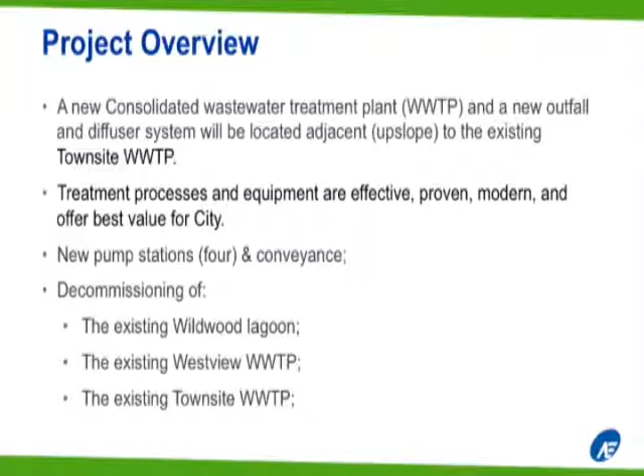So for newcomers that don't necessarily know these interesting areas of the city that I know quite well, this is the Wildwood Lagoon. So this is the Lund Highway here, and it's off to the right. You don't really see it unless you know that it's there. That's the Wildwood Lagoon. This is the existing Townsite treatment plant, or to be specific, that little thing right there is the existing Townsite treatment plant. And First Beach is this area right here. And here's the Westview treatment plant site. You're probably most familiar with that one.

So about March last year, the city asked Associated Engineering to work up 2 possible themes, and eventually selected the natural integration theme, which was a theme that would integrate the facility into the natural environment and blend in as much as possible with the surroundings. And we'll show you what that has involved.

But at that time, we gave quite a few sort of landscape views of things, and I think we have one or two in the slide deck that I'll show you shortly. We had a public open house on May the 10th, showed this approach, and Council passed the motion on the 17th of May to proceed with detailed design of the natural integration theme. You may recall that this is what it looked like.

Here was the plan view that we used at that time. And I said was because it's slightly changed. There's a significant group of trees here and another significant group of trees here. The roadway doesn't go through them anymore. It actually comes around them down to this area. But otherwise, things were pretty much the way we had laid them out in May 2018.

Okay, and again, Chair, from the bottom of the new proposed road around the trees, we have a dedicated right-of-way on that dirt road, correct? Yes. That's currently where one of the influent lines to the town site comes from, along that roadway. Okay. Are those the green roofs right there we were talking about? Thanks.

I'm not sure how much you want to know about the process, but I'll just go through the key unit processes that make up the overall system. Wastewater arrives, goes through screening, degritting. That removes a lot of material that can be problematic downstream. It gets into pumps, wraps around equipment, various things like that, and grit causes a lot of wear. So the earlier that's dealt with in the process, the longer all the equipment lasts downstream.

Then we have secondary treatment, which is an aerobic activated sludge system. Over 90% of the treatment systems around the world use one form of this or other, so it's a tried and true system, and when it's done in a modern way it's a very effective modern system as well. Secondary clarifier, ultraviolet disinfection prior to discharging through a new outfall system and diffuser that's about 60 meters deep, just off of First Beach, and about 1.5 or maybe closer to 2 times as long as that hockey stick shaped jetty. So it's quite far out now into Malaspina.

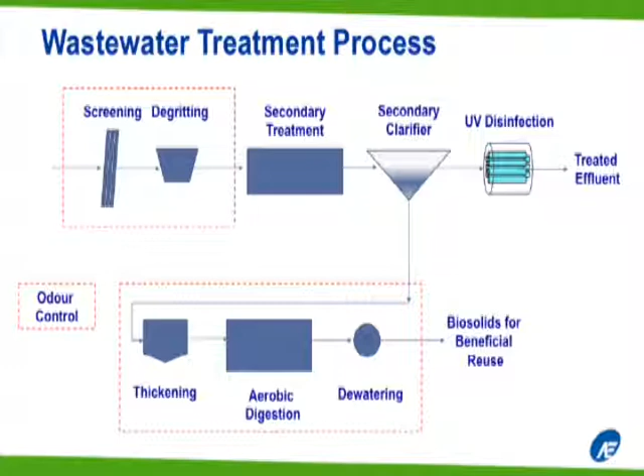Odor control, effective odor control has been a key consideration in the design. Foul air from raw wastewater and odorous processes will be contained and treated with the best available odor technology. Solids produced in the treatment process will be aerobically digested prior to being dewatered and transported off-site. And aerobic oxygenated processes will provide high-efficiency biological treatment without causing odors.

I just have a question. Are you going to, at some point, talk a little bit more about, if you back up the slide, that first bullet, what are these best available technologies? Sure. I don't have a slide prepared for that subject today. Let me think about that, and we'll see if we can address that for next time. Is that okay? Yeah. Okay.

So as I indicated when I started, we used a 3D software package to provide the renderings and the views that served that need a year ago. Now we've used a different package called Revit, which allows detailed design of structural, mechanical, electrical, odor control, piping, all these things to be done in the same three-dimensional space. It's very useful because it enables all the different disciplines to see how their work fits in context with all the other disciplines. That means we don't have pipes that accidentally run into concrete columns.

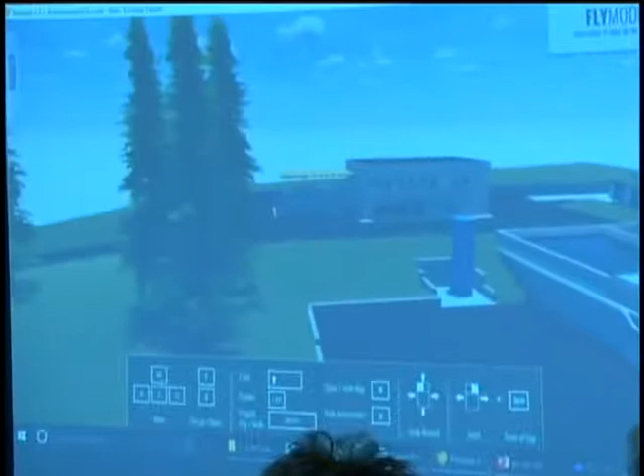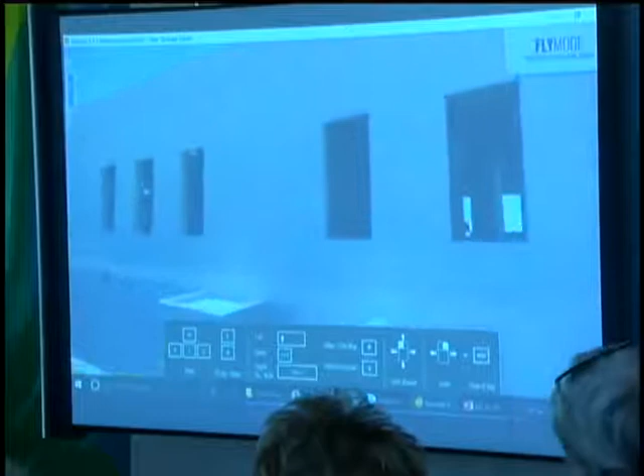So, Brett, why don't we start where the wastewater comes in? Okay. Okay, so, of course, the model just shows the grass to end here, but obviously it keeps going up towards the town site. But the wastewater comes in one common pipe over here. And then as you go through the wall, wastewater enters a channel. Looks quite blue over here. Obviously, wouldn't necessarily be that blue. And then it separates into one of 3 channels.

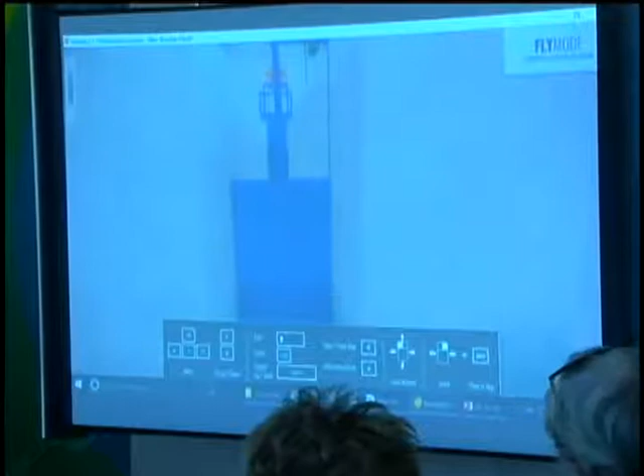So, Brett, can you do an overview, like a bird's eye view? Yes. Yeah, awesome. So flow comes in and it separates. It either goes to the right over here, or to the left, or in an emergency through this emergency bypass over here. So under typical operation, it would go either to the left or to the right. So let's say we go through the left, through one of these gates.

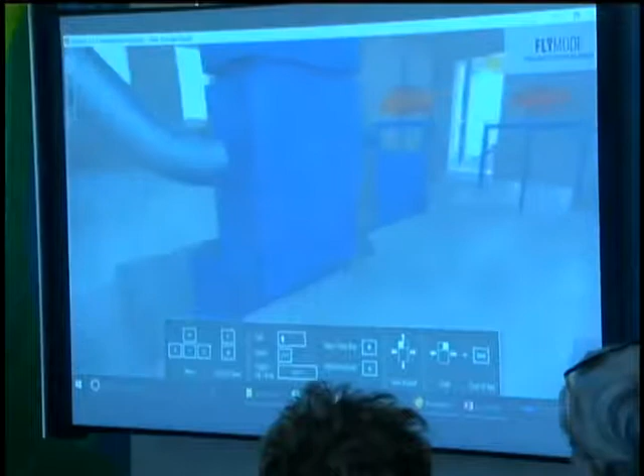Here is what we would call a trash bar screen. It wouldn't be commonly used, probably to remove things like large grease buildup if that were ever to take place and end up in the force main. But normally that would be in the up position. You wouldn't need to use it. And so flow would continue through and go through this screen over here. This kind of screen is a band screen. So it actually rotates as if on an elastic band. And with the screen, wastewater goes through the screen, out here and around the screen, and then through these channels.

Now the screenings material, so that's the solids that are captured in the screens. Brett, do you want to just back up a bit? Sure. A bit more? Yeah, okay. So in the screening unit, there's what's called a washer compactor. So it washes the screenings, takes out some of the water, and then it goes out through this chute through a screw conveyor. And if you just zoom out a bit, yeah, so there's actually 2 screw conveyors, one for each screen. And so the screenings would move all the way down here, each of those conveyors, and then it would drop to a bin that is on the floor below. So we'll get to that after, but that's what happens to the screenings.

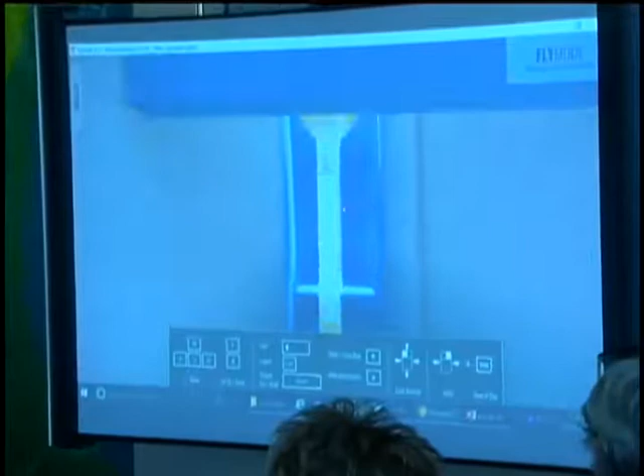And then if you keep going through the flow of the wastewater, you go through the channels. Okay, so this is through a Parshall flume. What this unit does is it measures the flow that's going through the treatment plant, so you know what's coming in. And then, Brett, if you could do a bird's eye view. Yeah, so at this point we've actually transitioned outside. For the screenings, we were inside the building. Now it's a bit of a change. If you look up, there's actually a canopy, and that is where the green roof is situated. There's a few access hatches at the top here, you see. In some of these locations, you're actually able to bring over a crane and lift equipment outside, up and over, and replace it that way.

And then if you keep going through the flow, past the Parshall flume, this is the location where the degritting happens. So the grit is particulates, things like sand, that accumulates and leads to a lot of wear and tear on pumps and other units downstream, so we want to get rid of that. So Brett, if you keep going through that. So the way this happens is we have this vortex system. There are mechanical paddles that move, and the grit is separated from the wastewater. Okay, let's go about that.

Okay, now in the event, unlike the screenings where we had one unit that was in operation and another, so we have two screenings units, but only one is required at one time. So if one broke down, you could use the other. For the grit system, we don't actually need that level of redundancy. So when the grit unit needs to be taken offline for whatever reason, there's actually a bypass channel just beside it. So that's over here.

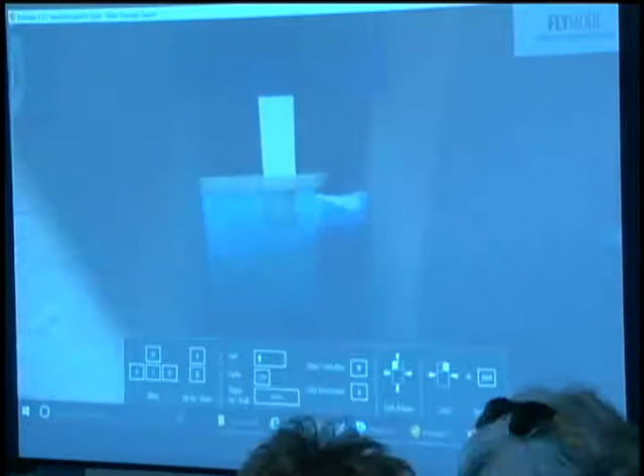Okay, so then let's go through the channels. Yep. Actually, councillor, it's not grating that's on top of those things. These will be solid, checker plate covers. So unperforated? Unperforated, correct. Yes. So trapping the smell. Yes, and if you ever needed to look into the channel, you have to lift it up. You can't see through them.

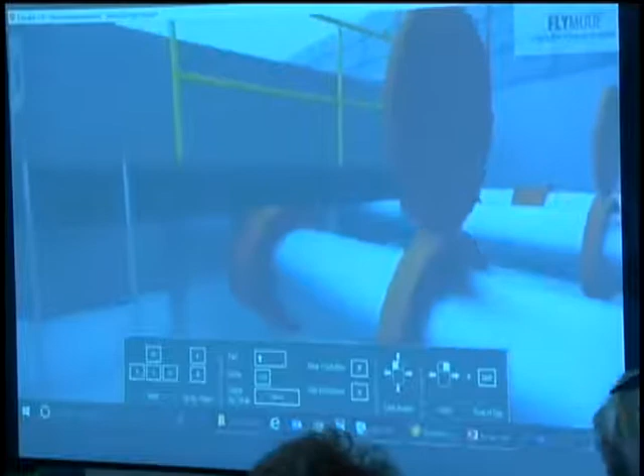Okay. So then what we have here is what we call a splitter box. So it splits the flow evenly into four. So you'll see 1, 2, 3, 4, and each of those streams is going to go into one of the bioreactor secondary clarifier components that we have. So if we go through one of them. Okay, so we go out this gate. Oh yeah, and then this is just an area just to do some work here. And then eventually the pipes, at this point, would be underground, buried, and then they would go to the bioreactor complex.

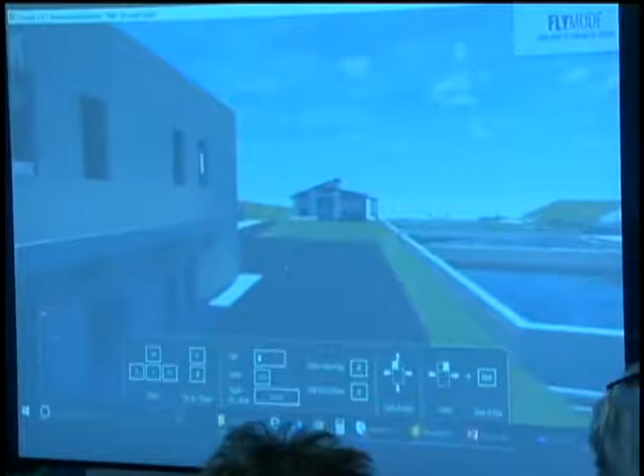So Brett, can we walk there the way we actually would walk? Along the road? No, other way. And then up above the secondary clarifier. So in the meantime, sorry, just pause there. If you look to the left, turn it to the left. Yeah. So you see all these roll-up doors. Maybe zoom in a little bit. There are roll-up doors here.

So if you recall before, I said that there were screenings that were collected from the screens. They're dropped to one of these bins. Which one is it, Jason? The one that's on the left is the screenings, the one on the right is grit. Okay, so they're dropped into this bin, and out of the grit system, those are dropped out into this bin. So those are collected, and then those need to be taken to a landfill. We can't use those beneficially. Similarly, if you turn just a little bit to the left, Brett. Yeah, so over here, it's not modeled yet, but a septic receiving unit would go in there, and so septic haulers would come in, park the truck over here, unload, and then leave the site.

Okay, so let's keep walking towards the... So, excuse me, through the chair, the product that can't be beneficially used, that you just described, needs to be landfilled, so where will that end up? So we would pick it up here. And then we would haul it where, and does it smell? Those bins can have a cover on them so that they would be sealed units to remove from this location. And currently, we transfer that type of waste to Pigeon Lake in Comox or Courtenay. Where are we going to store it in the meantime? It's stored here until it's ready to go. How many yard bins are they? 20 cubic yards. So then we'll just swap out another one. Yes. So you fill up here, cover, shipped right out to Pigeon Lake, and then a new one goes in when it's filled.

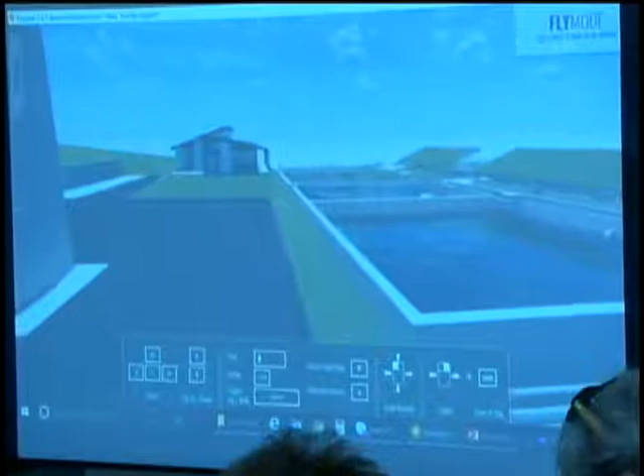Yeah, and one of the benefits that you will enjoy with modern equipment is that the level of washing on the screens and on the grit is significantly better than you've got at any of your facilities right now. And what that means is that the level of organics that's being left is much lower, and that reduces the odor potential. It's not difficult to be around this equipment. Nevertheless, it's indoors, in covered bins, with the doors closed, where all that air is being pulled into the odor control system. Through the chair, how often are we going to have to truck that, do you think, for the community?

Not on a very frequent basis. No, I would suggest less than once every 2 weeks, but I'm not sure the last time we looked at that. The bins are quite large. Yeah. And the city would have the option of going with smaller bins if they wanted to do that more frequently. Yeah, but through the chair, the follow-up question I wanted to have.

Are we going to see a lot more trucking costs then with this system than we're used to? Because right now we have the biosolids that build up, and then we take them to the lower mainland, I think, or to the peninsula, where they spread them in the forest there. They go to Vancouver Island. They go this way? Solids do, yes. So this sounds like we're going to have more trucking.

Currently, if we follow the process of today, we'll have more trucking because we'll collect in the 3 processes that we currently have. We'll be trapping more trash, and we'll be collecting more biosolids. Okay, so yes, initially our trucking costs will go up. Ideally, we're looking for a stay-at-home answer for our biosolids. At this point, we don't have a way of dealing with that waste within our region unless we truck it away. So with biosolids, we're looking for stay-at-home options, but we're not there yet.

One more question. So what typically makes up the solids, like what would be in those solids? So in the screen solids, plastics, rags, anything that's flushed down the toilet. Grits? Swiffers, yeah, flushable wipes, any of that. Okay. That's what would be removed. So if people become a lot better at not flushing these kinds of things, our waste would reduce. The screenings amount, yes, definitely. Any other questions so far? No? Okay, so if we keep walking down here.

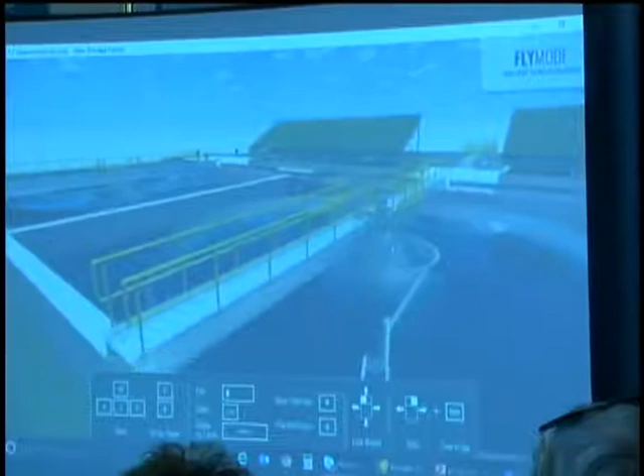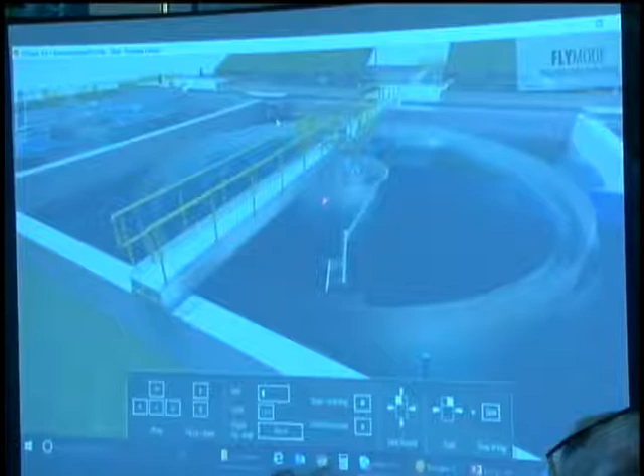And so Brett, if you could just go on top of one of the walkways. So let's just pause here. So this is a bioreactor combined with a secondary clarifier. What happens is the aerobic treatment takes place in the rectangular portion, and then wastewater goes into the circular portion where there's an actual separation process. And from here, all that's left between getting this now treated effluent out to the ocean is just UV disinfection, which I'll show you in a minute.

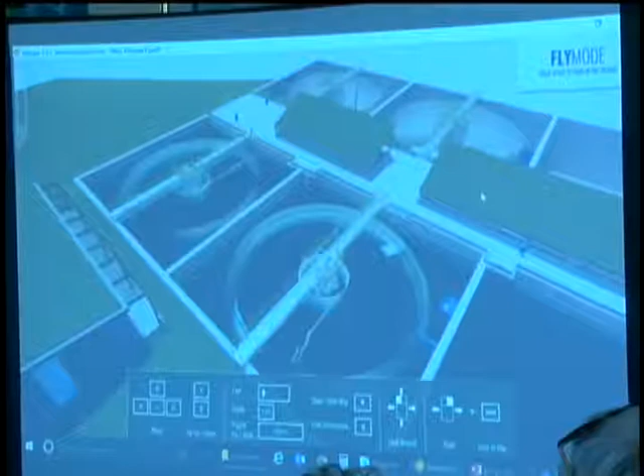Brett, can you do a bird's eye view? The way we've configured this is there's 4 identical suites. So there's 1, 2, and then 3, 4. Whenever you need to take one out of service, you would take down the entire system. That means the secondary clarifier, the bioreactor, all of the pumping associated with it. And while you're doing work on whatever component required maintenance, the other units could be used. So you have full redundancy here.

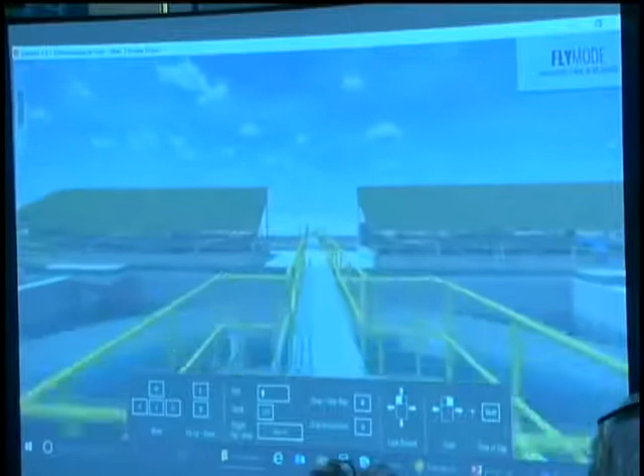Brett, let's walk across the bridge here. So let's go across the way, and we'll show what the mechanism looks like without the wastewater in it. Yeah, so that's sort of what the components look like. Can you do more of a bird's eye so we can look at the aeration system?

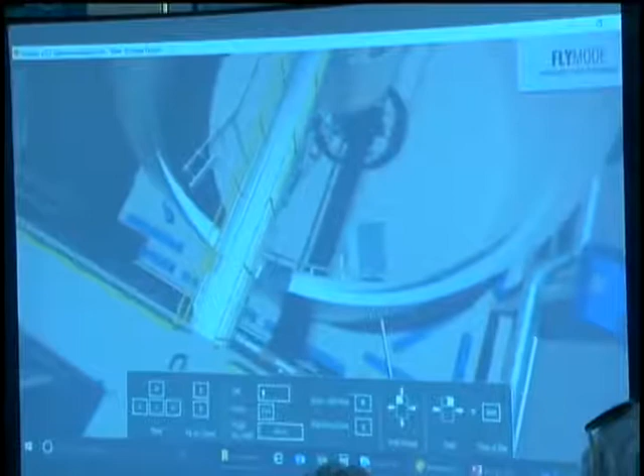So these blue panels down here, diffused aeration. You have an air header coming in, really small bubbles are produced, so fine bubble aeration, and that's what helps with the breakdown of the organics in the wastewater. And then it moves over to this secondary clarifier, where the clarification process happens, so the solids separate from the liquid.

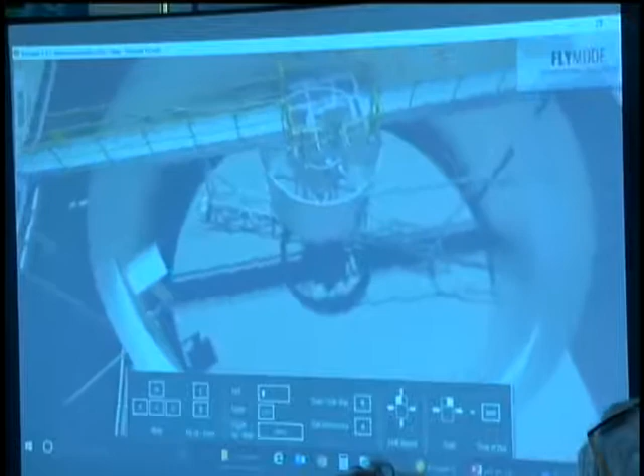Okay, so Brett, can you go into the gallery through the stairs? Yeah, so this is now simulating what it would be like to walk down these stairs. So this is into the gallery.

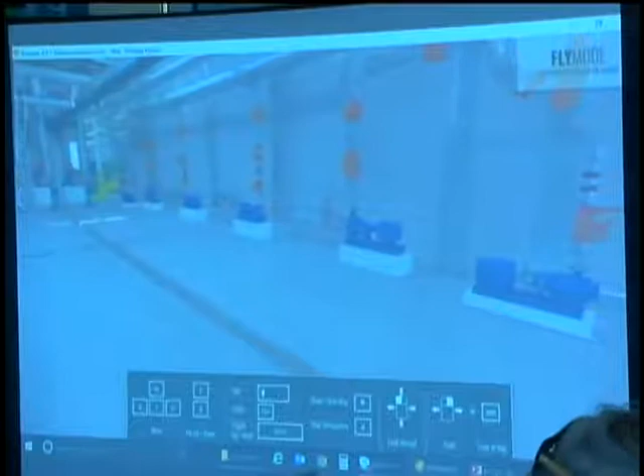So in here you'll see there's essentially three pumps for each of those components, each of those units or suites. So we have a scum pump, a waste activated sludge pump, and a recycle pump. If you keep walking down, oh, let's turn the other way, sorry. Okay, so let's just stop here.

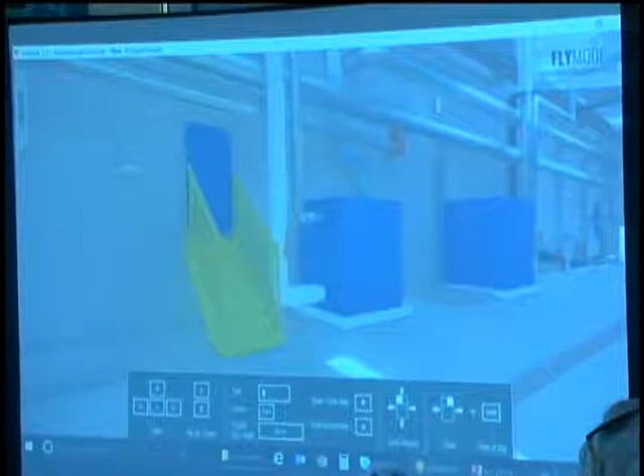This manway is what we would call a marine manway or marine access door. So whenever one of those tanks is taken offline, rather than having operators go down in ladders, we've actually provided a way of entering the tank safely through the gallery. And these stairs over here, they're not permanent stairs. You can move them around. And so we've shown them in a few places, but it's just one set of stairs that you move to whichever location you need to.

Here's some blowers that provide air for the aeration process. And let's keep walking down here. So entrance into this building, you have a roll-up door here. And so the way that equipment would be maintained, you'd bring the forklift in, lift up the pumps or whatever other equipment you need to, and take it out. There's also a manway over here. And then along the way, you'll see there's also a lot of piping in here, ducting as well. Okay, now let's walk the other way.

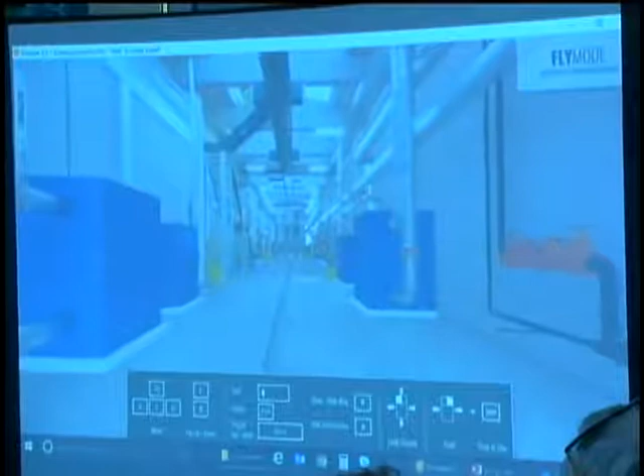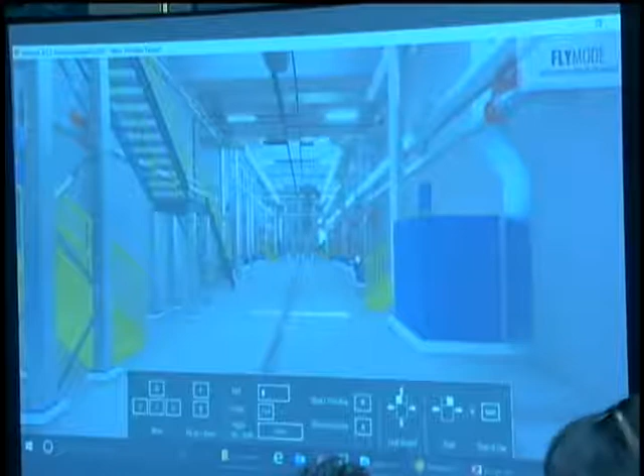Excuse me. Yes. Sure. Yeah, I've got a question for you and a quick comment. The question is that the aeration tanks that are there depend on blowers pumping air through the liquids to do the treatment process, right? Yes. Does the amount of air required change depending on temperature? Because I've heard other people say that some treatment plants on hot days tend to emit odors and some don't, and I just wonder if temperature makes a difference in the process.

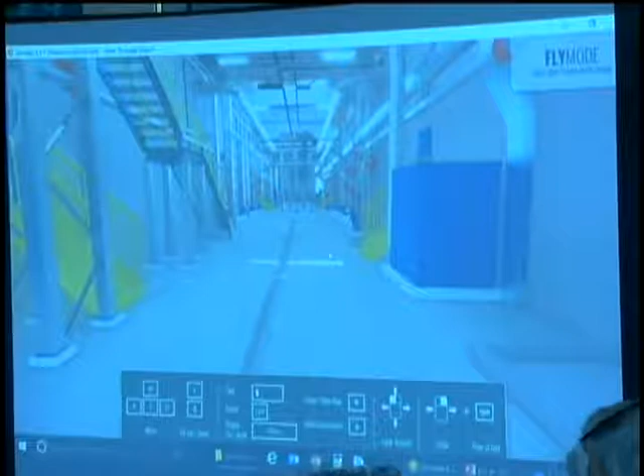I mean, temperature wouldn't be the greatest factor that would affect it. Really, the equipment that we're selecting here is fine bubble aeration, and that piece of equipment is so efficient in transferring the bubbles to the wastewater. And the way that we would control that is making sure that there's sufficient oxygen in the water, that the transfer of oxygen is taking place. So we would be measuring that and controlling that, and you would be able to provide more air if required or less air if required. And just on the same topic, are there backup systems in case the air pumping systems break down? Yeah.

You are correct that biological systems operate faster in warmer temperatures. And you're also correct, though you may not have intended to be specific about it, but it's harder for a blower to compress and blow air when the air is warmer and less dense. So two things happen when the temperature warms up. The process picks up, it goes a little faster, probably only a degree or two. Water isn't changing temperature like air temperature is on a hot day. But blowers have to work harder. We've taken both of those factors into account, so there will be more than ample oxygen for all days of the year.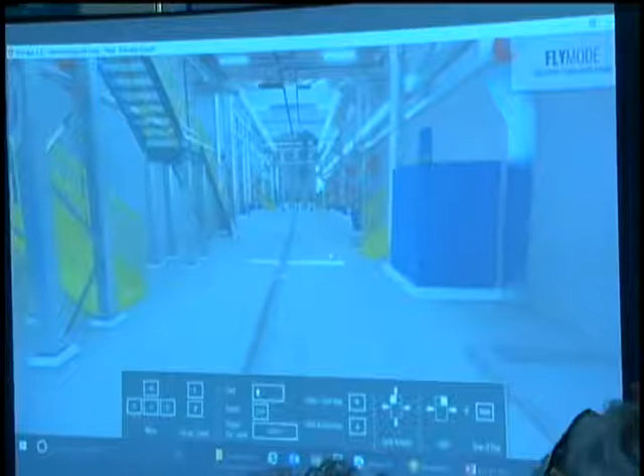If a blower breaks down, which should almost never happen, by the way, and especially with the proactive maintenance program, that shouldn't be happening. If that were to happen, then the process of one tank is emptied into another tank, and the blower is repaired and worked on. So there's no situation where nothing's happening for more than 24 hours.

Okay. Just the last comment was, we've had some discussions about this, and I think we'd prefer to have personnel doors rather than manways. Fair enough.

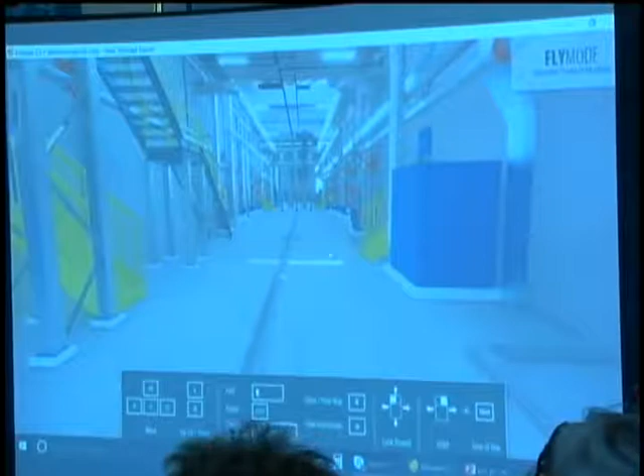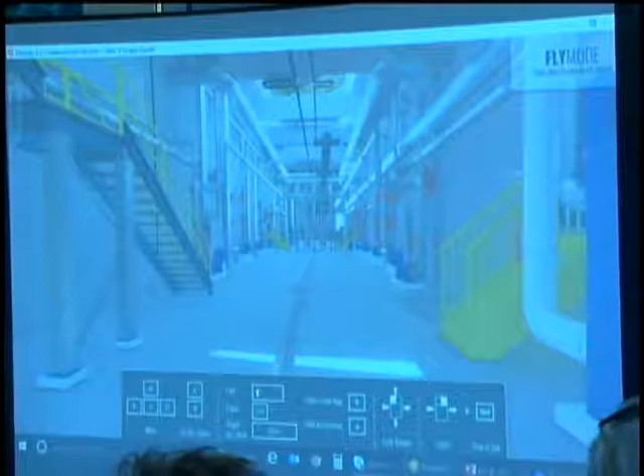And just to add, there is a blower dedicated for each system. So like Tom mentioned, if one of the blowers were to go down, you just transfer all the wastewater to one of the other four components. Okay, so let's keep walking down.

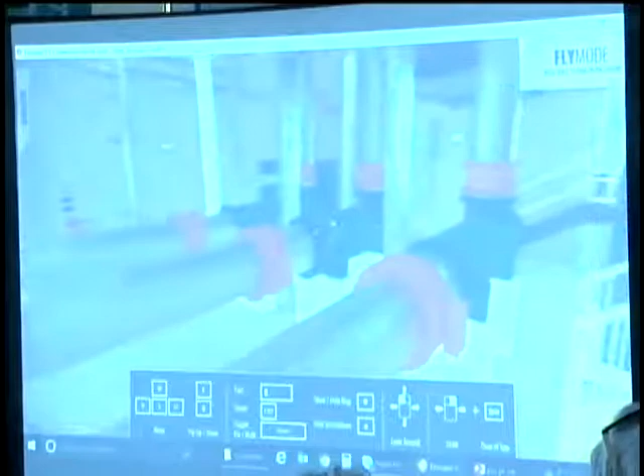So following the secondary treatment process, and just before we send the treated effluent out into the receiving environment, we go through the UV disinfection system. And so, Brett, can we look the other way? At the bulbs, or at the lamps. For sure. So flow comes in and then it goes up over here and then out here and then out the outfall, or out down here and then out the outfall.

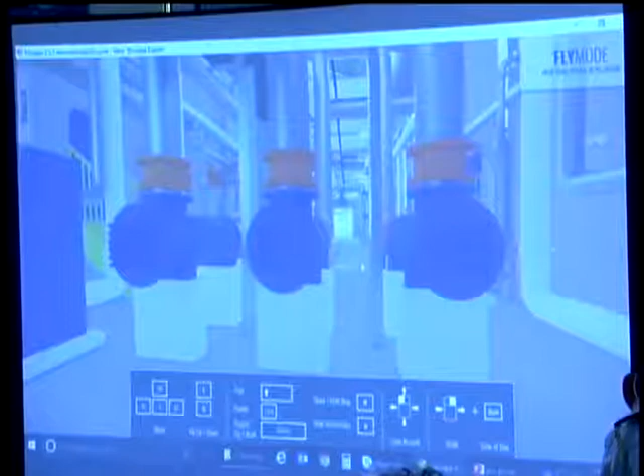But just before we go there, let's just turn back to the lamps. So this is where the UV lamps reside, and this is where you take them in and out from. Okay. And so typically we have two of these units in operation, with a third one on standby if we needed to do that.

And then if you turn around 180 degrees, this is just an access door out here. We did not provide roll-up doors here, that was just on the other side. So if any of the equipment on this side needs to be maintained, it has to be taken out the other direction. Can we go out this way? Mm-hmm.

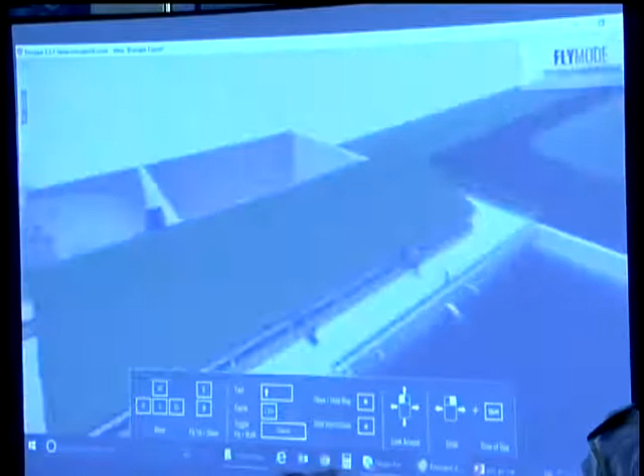Okay, so in addition to the secondary treatment process, we also have aerobic digestion over here. Can you go a bit closer? Yeah, and actually let's go to the empty one. So there's 2 units here. Geometrically, the rectangles are exact dimensions to the other 4 reactors. And that was done a bit purposely. If in the event that you needed to add that much more capacity, you could actually retrofit these spaces to add a 5th and a 6th space.

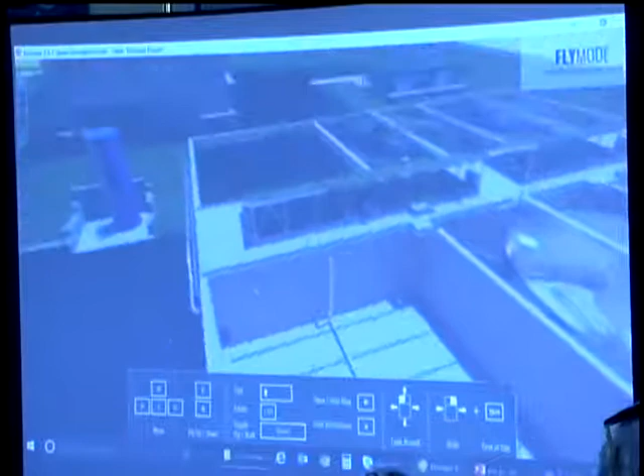So right now the solids are collected from the bioreactor, and then they're aerobically digested through, these are the aeration headers over here at the bottom. And then if we go back to the process building, I can go into the DAF room. So this is a dissolved air flotation system. We thicken the sludge over here before sending it to the centrifuge, which dewaters it.

So let's keep walking over here. So this is our biodegradable solid waste? Yes. Right. Okay. So these are the centrifuge units. And so from here, you would get the material that is then ready to be used beneficially. So right now it's being dropped into a bin on the floor below, actually. Okay, let's turn around. And then can we just look at the electrical room?

I've got a question for you. Yes. The aerobic digestion of the solids, what is the purpose of breaking down the solids? I imagine biologically, so you're basically just breaking it down into simpler molecules or what? Yeah, you want to stabilize the solids before you actually use them beneficially. And so there's numerous ways of doing it. We've elected to do it aerobically. And so doing that coupled with the thickening of it allows us to create a nice fine and dry material that can then be reused.

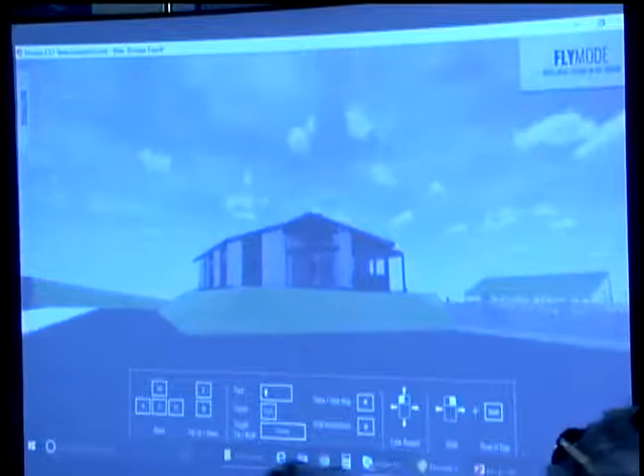Okay, so we're just going to go through the electrical room quickly over here. Okay, and then Brett, if we could go to the admin building. So right now we're not actually showing the driveway into the admin building, but the entrance would be through these doors. Okay, and then just on the right here, we have 2 workstations for the operators, and they're actually able to look down over the process. Okay.

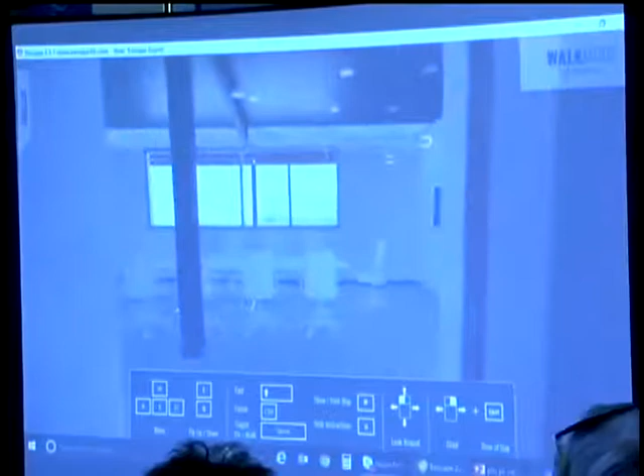And then you enter a much larger space, sort of common area. There's a kitchen over here, and again with the view of the process. And then on the other side, a screen. So if ever a larger meeting needed to take place, this would be the place where that would happen. Okay. And then over here we have an accessible washroom just on the left-hand side. And if you keep going, there's a meeting room. Go back to that little meeting. There's a view there at the window.

Guess we could send the CAO there.

I'll sit wherever you are.

Okay, and so then here just on the right, we have a little laboratory space to do some sample preparation. And again, there's a view over of the process. So we don't expect a lot of lab work to take place here. Most of your samples would be sent out to a lab.

Keep going. And so then now we're entering the change room area. So we've actually designated a clean side and a dirty side. And so if we enter the clean side, this is where operators would come in first thing in the morning. They have a space, they have cubbies and separated or combined washrooms, showers, but separated stalls. Can we just go into one of them, Brett?

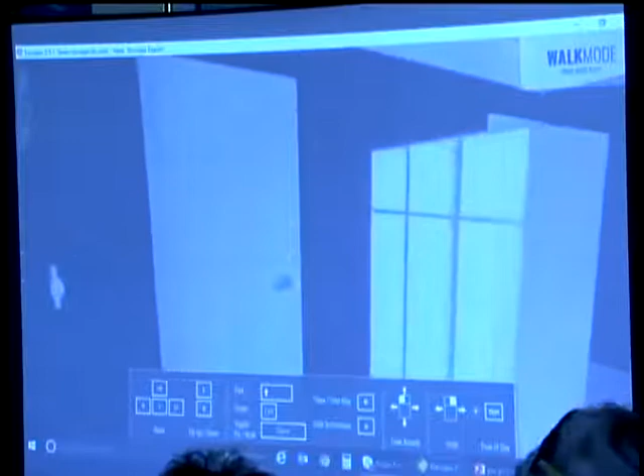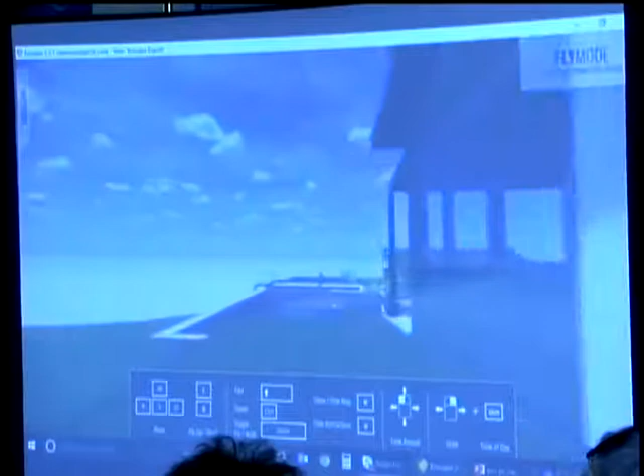This is where... It's not that real. Okay, great. And then this would be, once you have all your clothes on, you would... Okay, so you would exit over here, and then you could take the door out. Yeah. And walk out towards your space, which is actually on the other side. Yeah, walk around. So we would actually wrap around the grading over here. And then you're back to the front of your process.

Okay, so that's sort of a walkthrough of the model where we're at. Are there any questions on that?

Yes? Yeah, through the chair, it certainly is easy to see how our costs have escalated by your wonderful presentation here today. Tor, have you got the white jacket and coveralls ready?

I've got a couple of questions in terms of future. I know we've had these questions answered before, but in terms of longevity, lifespan of the facility, and population down the road that it can service. Yeah. So what were the projected flows? When did that expand? 150? Yeah. So very comfortably on the growth projections that you have, including Wildwood and also bringing in the flows from Plowman, no problem until 2050. It would take something pretty dramatic in terms of a population bump to need to bring a fifth or sixth module online.

You know, it looked a little while ago, a month back, that you might have one of those bumps, but that's the kind of thing I'm talking about. In terms of equipment longevity, for things like pumps, we would expect anywhere between 15 to 20 years if those are maintained well. The concrete could last upwards of 50 years easily. 75? Yeah. So by changing out pumps when necessary and that kind of thing, we could get up to 70, 75 years if we have to stretch this out, correct? Yeah. Thank you.

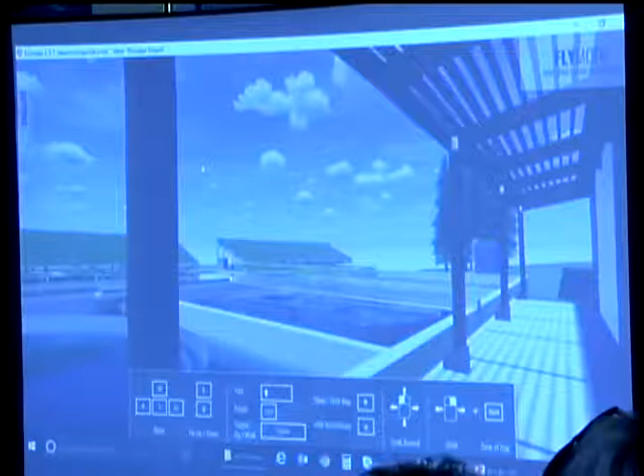Yeah, so I was under the impression the whole idea was that if we wanted to add 1 more, 2 more, they just butted up and we carried on. Yeah, it sounds straightforward and it seems to make sense. Almost always when you try and do that, 20 or 30 or 40 or 50 years later, you'll find that it's very challenging to connect a new structure to an old structure. Codes are changing, foundation requirements are changing. So we may be able to put it right next to it, but in reality you don't tie it into the same structure typically. That can be problematic later on.

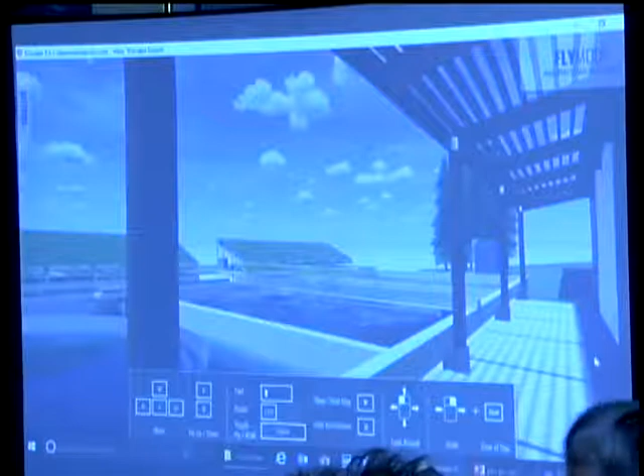Perhaps you can go to our plan view and just show where the expansion would happen if we looked at it. So I don't know if you have that. What about the civil plan?

And by the way, cool software. I love Revit. You have it? I don't use it.

So through the chair, just a question on cost, because I know the last time you were here, you said it's going to be a lot more than the 30 million we had originally proposed. Are we any closer to having a price tag on the overall structure? So we did do a cost estimate at a sort of a Class B, C level in support of the decision that Council made last May. And then subsequent to that, we prepared a grant application for the Investing in Canada Infrastructure Program. And there were a few elements that were added into that strategically, for the city's benefit. And so the number that went into that program was around 80 million.

At this point, in terms of the treatment plant, we think we're on track. And at such time as we're going to tender, we would update that with a Class A cost estimate. And if that's in a reasonable time frame, I think we'll be fine. Thank you. There's a lot of work out there right now. It's not the best time for a competitive landscape, but it is what it is. That's true. Thank you very much.

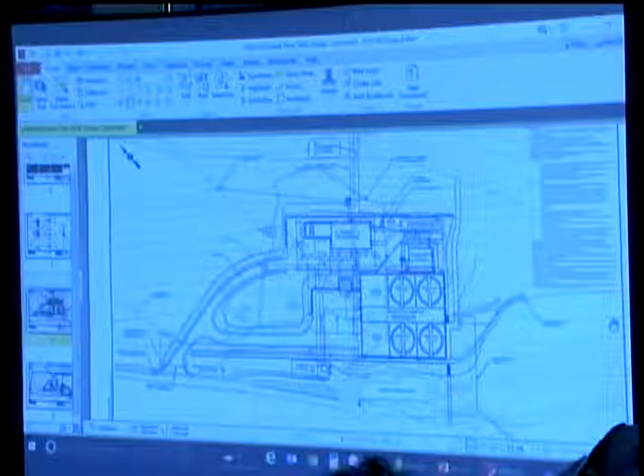Well, I don't know if you intended to hand me a great segue into the next part of the presentation, but I might use it that way. Two things. Mark Porter can speak to other projects where we've built green roofs, because I think that's part of the question that you're asking, so thank you for that. And also, when it comes to going above and beyond, I would say this plant neither goes above nor beyond. It's going to meet the regulations that are in place now. It's provided a design that can be accommodated for future regulations, although that's a bit of guesswork. We like to call that future proofing, and what might those regulations be one day?

Well, you saw in the outline that we want to talk about plastics. So there is no regulation for plastics right now, and we'll give you that presentation and show you how that relates to it. But just in terms of coming back to your overall question on costs, this meets your needs. This meets your needs going forward. This meets your population needs. But we've tried to think in terms of expandability or adaptability.

One of the great things about square tanks and square processes is that if a technology were to come along in 30, 40, 50 years that we don't know anything about now that does a better job with these things, this is kind of the ideal footprint to be able to reconfigure your process. You've got the gallery, you've got those square tanks. This is a modern design. This is what you want. Thank you for that, appreciate it.

Councilor, you want me to comment on the green roof? No, I would like to tell council that it's 3:05, that this is the time that we said that we would transition to the next part of the presentation. But nevertheless, we're here at your...

Could you just talk on the charcoal filter? Because you said you were going to talk more about the aroma later when the young lady was making her presentation. Sure. You said we'll be talking about that later. Now is that in part 2? Because we did discuss taking that insurance plan, which was buying that system. Yeah. You said we didn't need it, but we said we wanted it. Yeah, maybe Jason can give us some thoughts on that. Jason, why don't you come up and then we can transition into your plan.

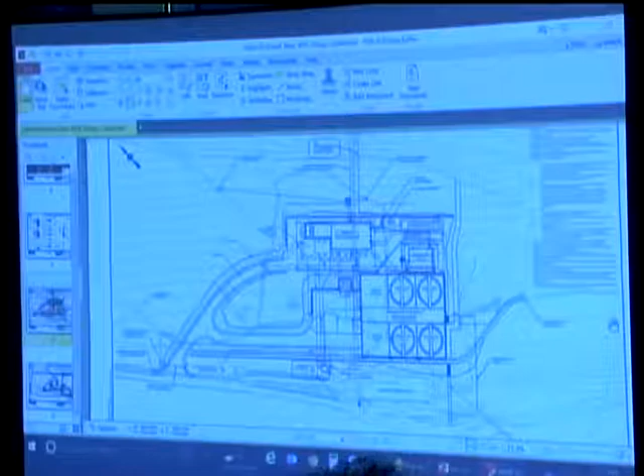Before we move on, I would like someone to help me understand a little bit more about the solid waste aeration, how solid waste is moved in solid form into the aeration and out and all of that stuff. It didn't make a lot of sense to me because it was kind of glossed past. I don't really know how that happens.

And maybe I don't need to know, but should we do that in this context? I'm not sure. It's your presentation. We talked about it here. I didn't understand it, and I would like to, that's all. Could I suggest that, since I'm not going anywhere afterwards, maybe you and I can talk and I can take you through that process? Sure, I'd be happy to do that.

Wonderful. Jason will talk about the odor control system that is going to be a part of this design. Council, odor in general is a very complex topic because there are many odorous compounds made up in wastewater systems. The system that we've selected is a 3-stage system that uses organic methods for breakdown of the organic odorous components.

We start off with a biotrickling filter, followed by a biofilter, followed by an activated carbon filter. The biotrickling filter removes the water-soluble odorous compounds, while the biofilter handles the non-water-soluble odorous compounds. Then on the back end, prior to discharge, an activated carbon filter is used to remove whatever residual odorous compounds are left over.

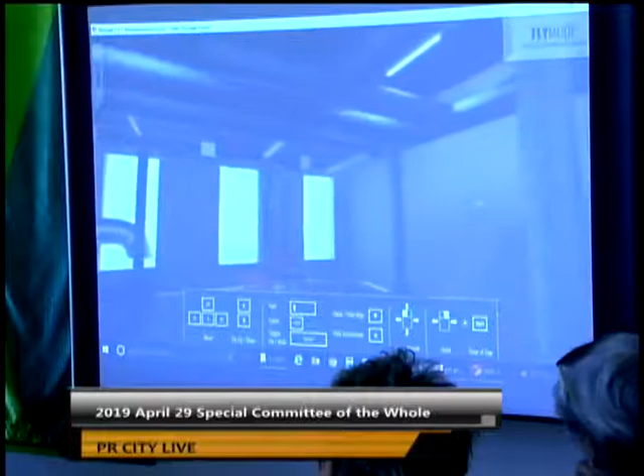Basically everything is moving east. By the time you get into the bin areas for the biosolids, the duct is, I think, 30 inches diameter, and that goes underground and over to the odor system. So there's a lot of effort here, with fairly large diameter air moving equipment, to actively pull that air off these parts of the plant and treat it in the odor control system.

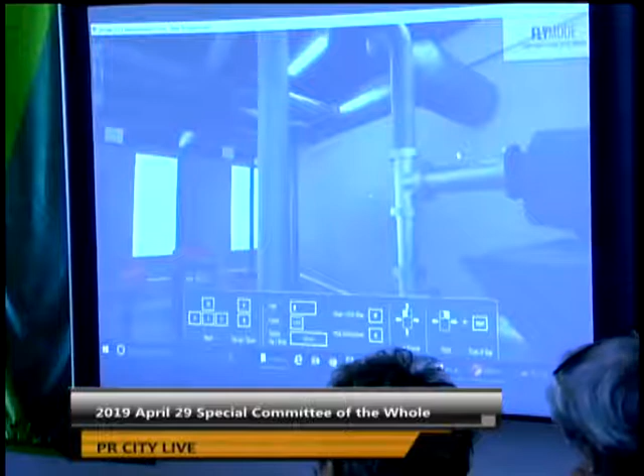Excuse me, through the chair. So is that odor control system part of that charcoal thing, or is the charcoal filter in addition to that? The charcoal system is in addition to the biotrickling filter biofilter system. Right. And it's a three-stage system. We were told you really don't need it, but we're doing it anyway.

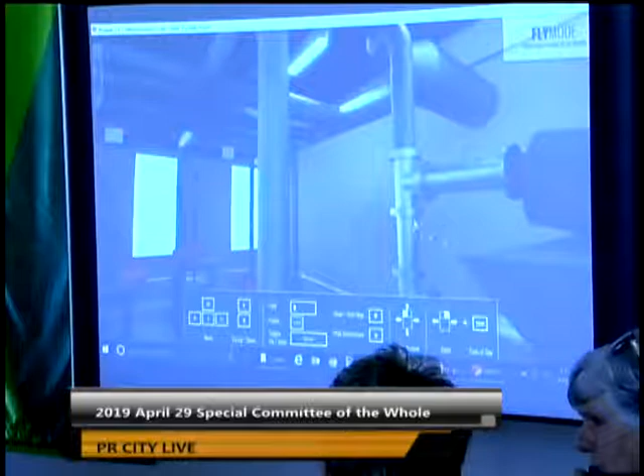Chair, can I ask that we move on so that we get the entire presentation in before 5 o'clock? I don't mind some questions, but I think we beat the odor issue to death, and everybody gets it, and I'd like to see the entire presentation, if we could. Thanks.

Are you going somewhere? Not necessarily, but they all are. They have to go at 5. Well, Tom said he would stay if he had to get my questions.

Plastics is a big topic for you, and so many other people right now are looking at the problem of plastics in the ocean with a sense of hopelessness and helplessness and concern. What we've prepared for you is a bit of a primer on the topic. I've broadened it to plastics because we're all aware that the problem is at every scale. So Jason's going to give a presentation once through, and then we can talk about, to the degree that you're interested, how this relates to the project that we're doing here. Okay? This is just intended to help support your discussion.

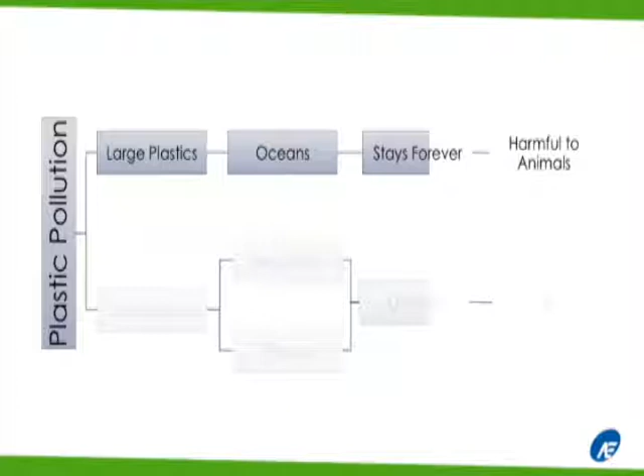Thanks, Tom. As Tom introduced me, I've been working on this project for about 2 years with Tom, and I'm going to give a little primer on the background of plastics and microplastics, particularly in the marine environment and how they affect it. When we think about plastic and microplastic pollution, what we're typically used to seeing is the discussion about large plastics within our oceans. Large plastics coming from various sources that are persistent in the environment and have been shown to be harmful to animals. So we're quite familiar with this.

There's a large number of articles that date back to the mid-90s, when the Great Pacific Garbage Patch was discovered in '97. We see a lot of articles that talk about how they affect animals, because an estimated 8 million tons of waste plastics are added to the oceans every year. This is an example of some photos of waste plastics floating at the surface in marine environments. Their effects on wildlife have been proven detrimental, where entanglement and ingestion have been shown to lead to mortality of these marine animals. Entanglement increases the likelihood of the animals drowning or rates of predation, while with ingestion they suffocate or encounter blockages which lead to mortality.

So that's a common topic we're all familiar with, but an emerging discussion is microplastics. Microplastics are smaller plastic particles that you're probably not used to seeing in the environment because they are quite small, and they come in two flavors, primary and secondary. Primary microplastics are things like microbeads, made to be small and added to consumer products that are introduced in the environment in an ad hoc fashion. Secondary microplastics are derived from the breakdown of larger plastics in the environment, like a water bottle left on a beach breaking down over time into smaller particles. These are making it into the oceans, but right now the effects are emerging, so this will be a discussion about these effects.

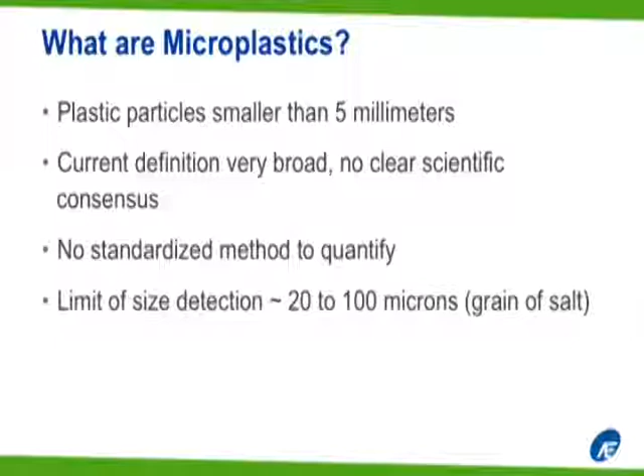So what are microplastics? The general broad definition is a plastic particle smaller than 5 millimeters. That's a very broad definition and lacks a clear scientific consensus, because different shapes and sizes of microplastics are present in the environment, and their effects differ for each size, color, shape, and material. Another issue is that there's no standardized method to quantify or count microplastics. Current best methods have a size detection limit of 20 to 100 microns, about a grain of salt. Because of this, it's hard to compare studies that use different methods for studying microplastics.

So where do microplastics come from? They come from a variety of sources, all man-made. They come in a variety of flavors, colors, sizes, materials, and some examples of areas in which these microplastics do come from are fish nets or fabrics. These result in microplastics that come in the shape of a fiber.

Industrial materials would be like the industrial feedstock for plastics. They come in pellets, or also called nurdles. So they would be bead-type formations of plastics. Another could be fragments, which are, for example, made by car tires. So when your tires break down, they produce particles or fragments, and those would be defined as microplastics.

Another would be a film, which would be derived from bags or cling wrap, items like that, or microbeads, which have been added to a lot of personal care products like toothpaste or facial scrubs and whatnot.

Some examples would be marine vessels dumping their waste overboard, or industrial processes where they're spraying abrasives, or runoff from the environment, say your roadways, where litter is accumulating.

Others would be household applications where you're using personal care products, or printing, toners would be another good example of microplastics. Or potentially even industrial or agricultural applications where you would use a plastic mulch, for example, that could break down into film and make it into the environment. So hugely complicated, variety of sources, hard to track down, hard to isolate.

Now, what are the effects of these microplastics? That's, I think, what most people are really concerned about. Sure, they're in the environment, but what are they actually doing? Here are some things that we know. Microplastics have been witnessed to be eaten by small organisms, small trophic organisms like plankton or other small organisms. And that has been shown to actually bioaccumulate and biomagnify in the food chain.

So we've been detecting microplastics all the way up in the food chain from animals that do eat marine life, small trophic organisms being eaten by fish and whatnot, moving up the food chain. It's been shown that certain types of microplastics can actually act as hormone disruptors, so potentially disrupting the life cycle of certain animals, and even as migrating up the food chain.

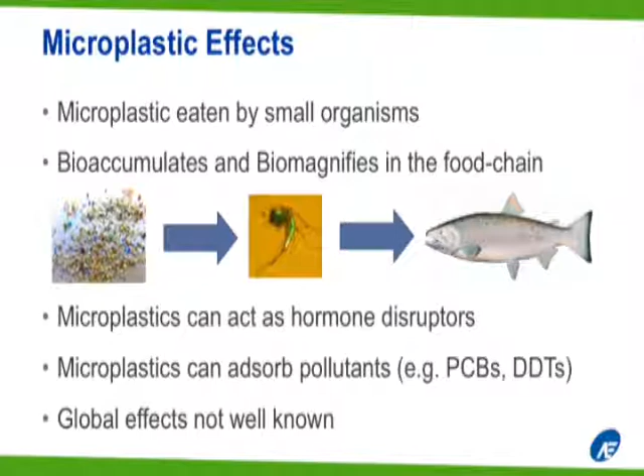But overall, the global effects of what these microplastics are doing are not well known, because what we've been studying has really been at a species level, and it's been really hard to accumulate the body of knowledge to understand what the global effects are. So, even though we might not understand what the global effects are, we can mitigate microplastics because it is solely man-made or human-made in the environment. So we can take steps in which we can mitigate microplastics.

So, some methods, from easiest to hardest. Well, the first being consumer education, where we could adopt best practice, reduce plastic usage, or minimize plastic litter. So adoption of best practices could be, instead of using plastic bags at the grocery store, use reusable bags, which would eliminate not just potential plastic litter from end users, but also the supply chain in which plastics are produced and could be lost in transit into the environment, producing secondary microplastics.

That also ties into reduction of plastic usage, which reduces plastics in the life cycle, and also minimization of plastic litter. So tossing plastics into the environment, littering, is a huge source of microplastic pollution.

The second would be legislation, where we enact legislation where we ban single-use plastics or legislate against the use of specific plastic products for single uses. And the last would be end-of-pipe treatment, which is very difficult given that there are a variety of sources of microplastic pollution. Some of them are not so easy to treat prior to making it to the environment.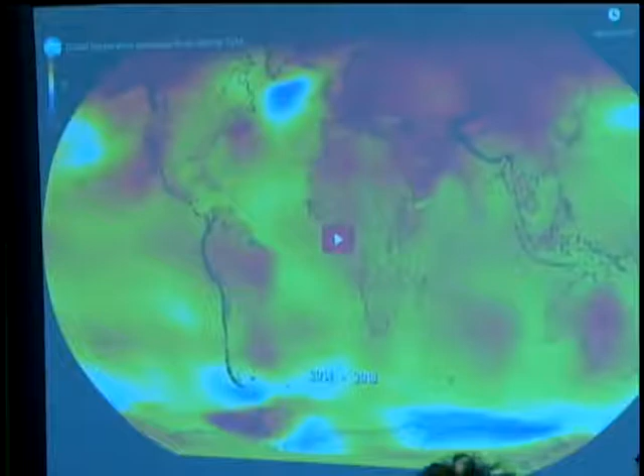Right, there we go. So that was from NASA. This is looking at the latest report that Environment Canada has done at the national level, which just came out a month or so ago, looking at data trends from 1948 through to the latest records that we have. This is looking at temperature; the red arrows are where temperature has increased, and the blue arrows are where temperature has decreased. As always, there's variation depending on the microclimate and where we are in the country, but the message quite clearly for me is that the temperature is going up right across the board.

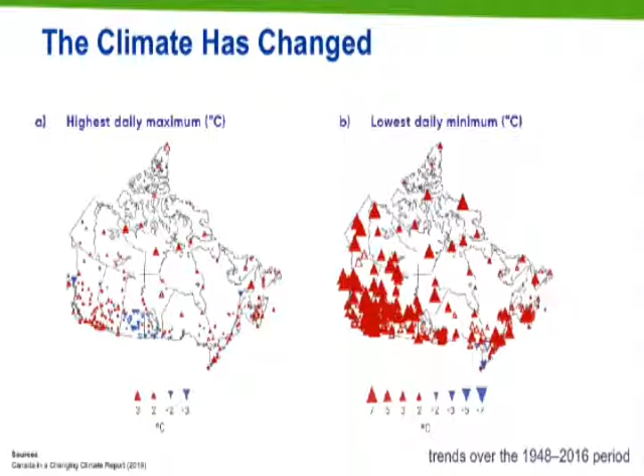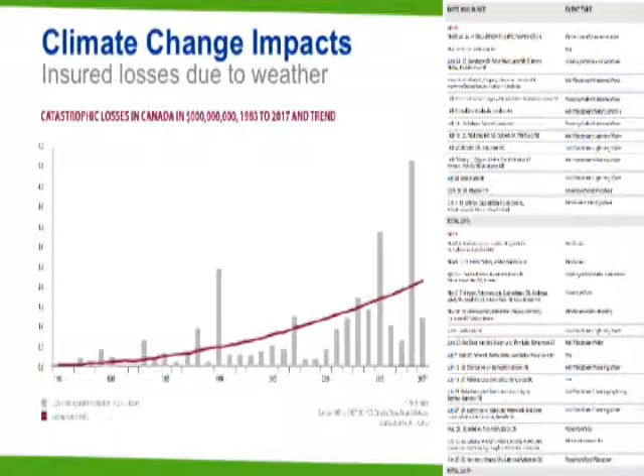So that's happening. And then just to bring it even more locally, I did a little bit of research, and you'll have seen and felt in this community power outages due to extreme events, wind. Even this last weekend there were warnings, but this was in January, a wind warning issued. So what we can see is those extremes of weather increasing in frequency.

So what's been happening, and you're aware, is that we've been trying to match what's been happening with the climate change projections. At the global scale, this has been done all around the world. There are these big, massive computers that have been programmed by numbers of scientists, taking what's been happening in history, modeling that with all of the events that happen naturally, volcanoes, forest fires, all of that stuff. They take all of that into account, huge computers, and they model it at quite a coarse scale, and then test it against history to get the projections going forward. And actually they spend more time matching that to what's gone on in history to make sure that they're projecting it correctly in the future.

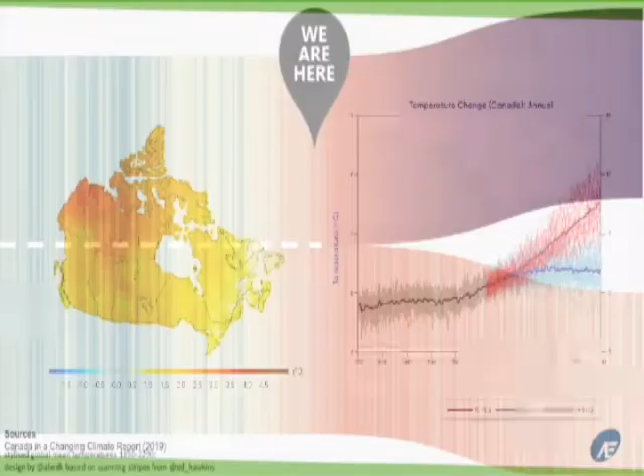And so just to bring that home, this is an infographic, but it shows that we as a society are at a point where we have to start making some decisions, both in terms of changing our behaviour in mitigation, but also in adaptation too. We can't just do one without the other. And this is temperature. And here, looking at that at a national scale, again, this is temperature. So we're kind of about here.

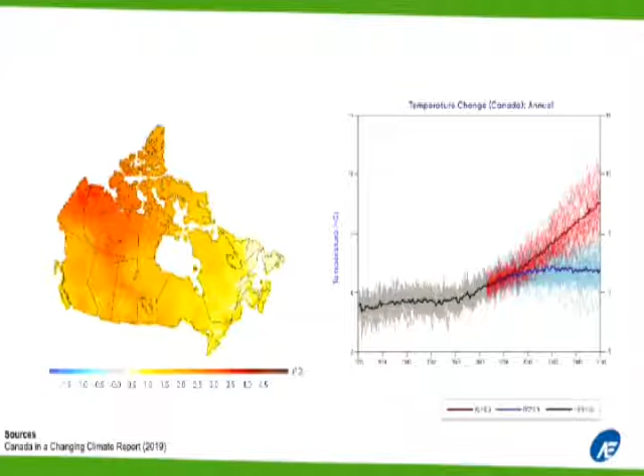And what's happening here, these two pathways, is if we manage to reduce the amount of carbon that we're emitting, and severely reduce it, then we can follow the blue line. However, all of the modelling at the moment suggests that we're tracking on the red line, so we're going on that higher path. And so when we're looking at adaptive measures, at the scenario in 70, 75 years, we are tending towards looking at what's going to be happening on that higher line rather than the lower line, assuming that we're not going to make it. Hopefully we do.

So there's a link to the University of Victoria's Pacific Climate Impacts Consortium. They have a really good website where you can very quickly get some general trends for the local environment. I went in and looked at what they were saying in terms of impacts for Powell River: decrease in snowpack, more high-intensity precipitation, increase in hot and dry conditions, increase in temperature. Now, some of these things could be viewed as a benefit. You might get more growing days. So when we're talking adaptation, it's not just the things we need to do to protect ourselves, but also ways in which we need to adapt to change and take advantage of that change.

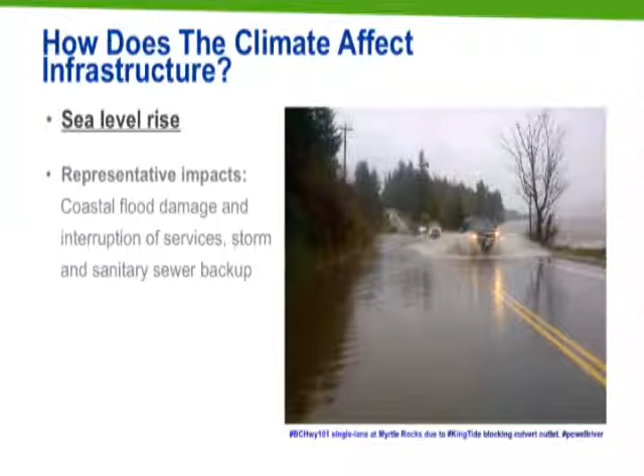Summer extreme heat, wildfire, I think is a huge one. We've seen it. You can probably tell from my accent, I'm not native Canadian. We moved here 12 years ago, and in the time that I've been here, my wife and I have observed that the incidences of fire have increased amazingly. Something that we've observed as a family is that we're now considering where we go during our summer breaks because of the risk of wildfire.

Dryness of the atmosphere. Were you indicating that the research you've done here, though, actually showed that we're going to see less heat and more moisture in this area? Did I get that right? So it's interesting. What we're going to see is in the summer, generally a drier, hotter summer.

Oh, okay. But the impact that heat has is the air expands, more water gets absorbed into the atmosphere, and then that gets dumped onto us in an increase in intensity of storms. So I think your overall precipitation will increase, but you'll see less in the summer and more in the autumn and the winter. And usually it's extremes. So some folks that I talked to seemed to know what they were talking about when we were talking about forest fires.

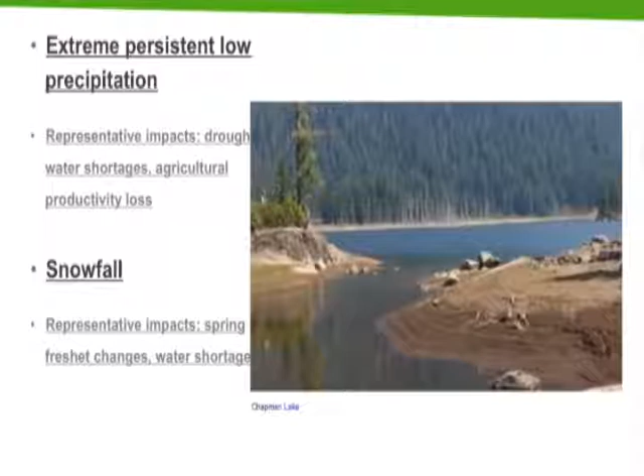And then the other thing is wind gusts, and what we're seeing is increasing intensity in the storms and the wind, and then power outages, and that has trickle-on effects. So your power goes down, and it affects treatment plants, or it affects other pieces of infrastructure that then you've got to try and get back, your gathering places in the community and other things like that.

So, what can we do about that, or what are other communities doing, what can Powell River do about this? There's mitigation, and I think mitigation is pretty well understood, and you yourselves are doing a number of things on the mitigation front, and that's around sustainable transport, clean energy, reducing our GHGs, and then there's adaptation on the other side, which is that resilience piece, redundancy, flood protection, maybe not necessary here, but there's some disaster management, what are you going to do when something happens. And there's a whole bunch in the middle, which is both mitigation and adaptation.

But we've got to look at adaptation, current and future, and just a couple of clips here from Surrey, which re-echoes what we're talking about in terms of stormwater changing, and climate change related flooding, and the incidence of that increasing. And so when we design a facility, what we would try and do at a facility level or a project level is look at all of those extreme events and say, how resilient is this project to those impacts? And we have been doing that with the wastewater treatment plant, and in fact I think it's a requirement of potential funding.

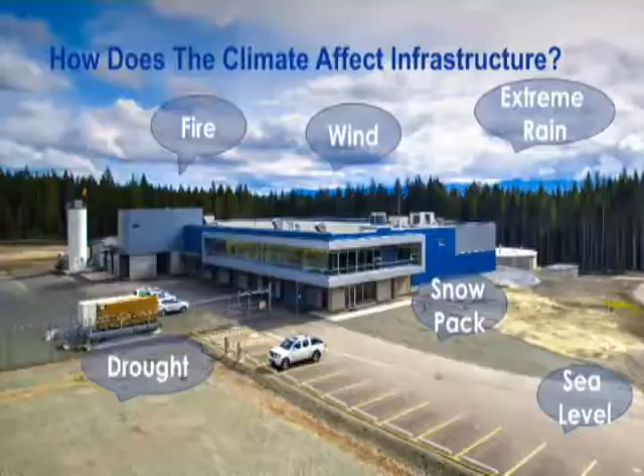And so when we're looking at a design lifetime of a project, your master plan might be out 5 years, your roads out 30 years, your bridges, buildings 50 years, your sewer system 75 years, something like that. So what does that mean when we're designing that as a project, when we're putting something in place that's going to last that long? How do we take that into account, looking at those increases in the occurrence of those big events?

This is a snapshot of what we've been doing with Capilano University, literally just in the last month or so, as we've gone through their campus, and that's at a campus level. We're doing something similar for the City of Nanaimo, but it basically says, okay, this is the piece of infrastructure that we're looking at, this is what's going to happen, and these are the recommendations that we would take to look after that for the future.

And then just to give you a snapshot of what's happening that I'm aware of, it's probably not an exhaustive list of what's going on or has gone on in the last couple of years with some other cities and municipalities. Nanaimo, as I mentioned, we're working through that. Langley have something going on right now, Kamloops, Kelowna, West Kelowna. So a lot of cities are starting to look at this in a structured way so that they can feed it into their master plans, their bylaws, and think about this in a progressive and structured way rather than responding to it after an event has happened.

And I'll just quickly look. So City of Nanaimo, this is really early stages. Essentially what we're looking at is all of their assets at a very high level, and then trying to work with them to prioritize what things need to be looked at first, what are the most high-risk vulnerable things, and put a bit of a plan together. And then this will feed into their overall master plans.

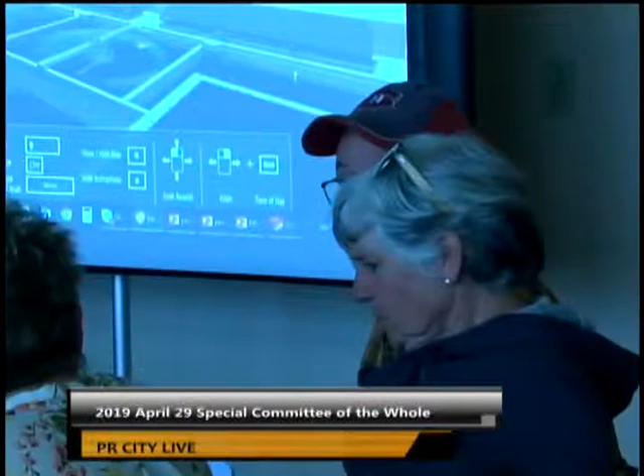Mr. Weaving. Yeah, last year, I think it was May, I gave a presentation here at City Hall. Mr. Robinson was there. I think, Tor, you were there. Karen Skatshine, who had the file at that time, and some others. What I presented was about 18 ideas that revolved around viewing it as a community asset and how to develop it as such, trying to get community buy-in. And I left that with Matt Fraser and others to view. I'm wondering if any of those ideas are going to be used, or ideas like that.

Chair, I don't believe I was at that meeting, Dave. Was that in this room? No, the back room here. Oh, okay.

I would have to see your list and look at that again, Dave. You weren't provided with that through City Council? I can't say I was. Dave, was that a meeting here in council? No, it was in the conference room in the back. It lasted about 2 hours. I think I remember that. Mayor Formosa was there and others, Karen Skatshine, Tor was there, Frank was there before he retired.

I think I remember seeing that list. To provide you with an answer, I think we need to go over that list again. It's been a while since we've looked at this. Well, I can even provide council with a list. If I may, another question.

After that meeting, Elizabeth and I had a meeting with the mayor discussing architectural design and the appearance of it. And I went out and took pictures of various buildings in Townsite that Mayor Formosa agreed upon, and I sent them along to him. He told me for sure these were the ideas he was comfortable with as well. He was very enthused about it. Any comment that way, Tom?

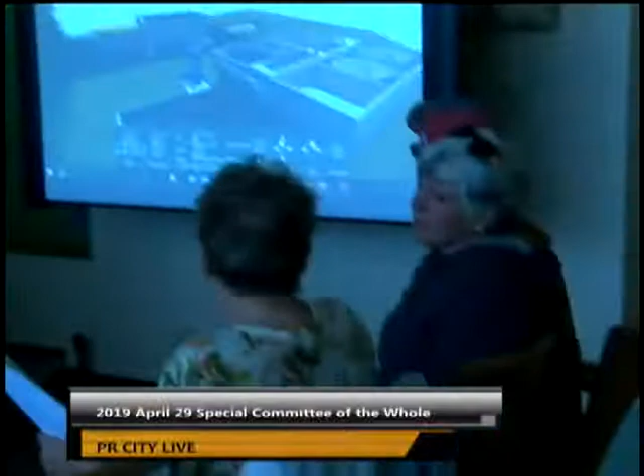Yeah. So to me, it seems to boil down to cost and risk. And we discussed this last year when you were here about those large vats, and I'm not sure the diameter of those vats, but I'm struck by the proximity to students, 400 students or so, and staff at Brooks and the neighborhood, and the fact that there is sludge in those large vats, and insects, migratory birds, that's on the fly route. And we had talked about a fine mesh screen. I know it's cost, but we're also talking health risk and long-term health risk as well as short-term.

So this, I don't know if that's a question, but it's definitely a thought. I don't know how big those vats are, and they have sludge in them, and they're being aerated. And there are insects, and there's this season called summer, which gets hotter and drier and longer. So, a mesh.

So, through the chair, I'm not sure the vats that you're referring to. I'll just say, the large vats? The aeration tanks. Yeah. Okay. The tanks, yeah, the aeration. There's 4 of them. So, as I will say again, and I have on many other occasions, the processes that we're using are natural processes, naturally occurring bacteria that break down the organics in the wastewater.